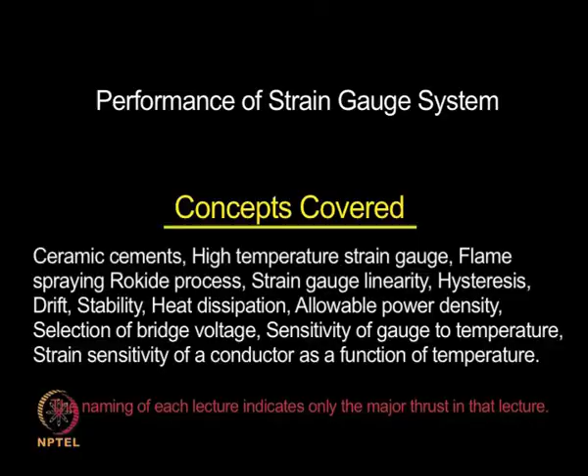Let us continue our discussion on strain gauges. We have looked at, in the last class, the strain gauge as a system consisting of the metallic grid supported by a carrier, which is bonded to the specimen by a suitable adhesive.

We have looked at quick setting adhesive like cyanoacrylate. Then we looked at epoxy, which is meant for sophisticated installations like in transducers, where you need to provide a very thin bond line, and also it should be suitable for longer periods of operation. Then we looked at polyester adhesive.

Now, let us look at the ceramic cements. Ceramic cements are useful for high temperature applications or in radiation environments. Nuclear power is becoming very important, so you need to live with radiation environments in such installations, and in such applications organic adhesives cannot be employed.

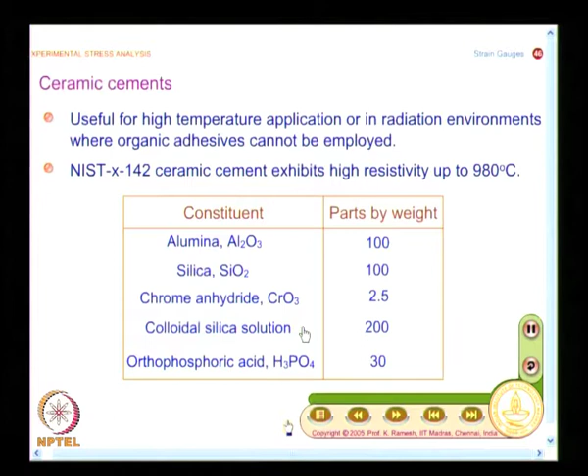So what you have here is a blend of ceramic powders such as alumina and silica, combined with phosphoric acid, mixed with a solvent such as isopropyl alcohol and an organic binder to form a liquid. Essentially, you have this ceramic available as a liquid, so that it is easy for you to apply it by a spraying process.

And what you do is, on the specimen you provide a pre-coat of the ceramic cement. After application, it is fired to form a thin layer between the gauge grid and the component. So it is a very elaborate process; you need proper training to handle this kind of special cement.

So once you form a thin ceramic cement layer on the specimen, you place the gauge, and the gauge is also very special - we will have a look at it a little while later. You have to remove the carrier of the gauge and place it on the thin layer of ceramic, and a second layer of ceramic cement is then applied.

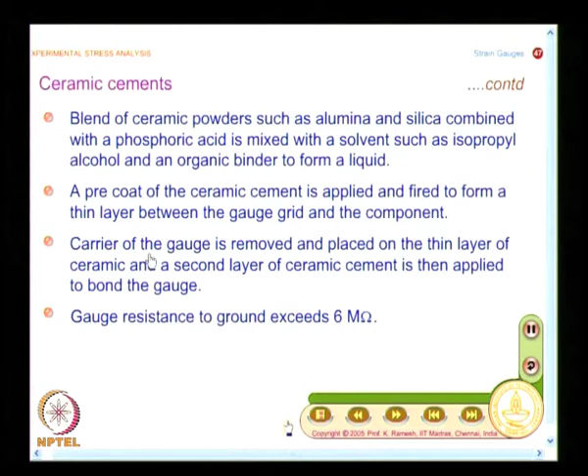So what you see here is you need to have a strain gauge such that its carrier can be removed. And you have an example of how such a gauge can be constructed. I have a sketch here - I essentially have a wire type strain gauge, and you have a Teflon tape carrier which could be peeled off, and you make a decent sketch of this.

So what you have here is gauges are constructed with a grid fabricated from wire, which is mounted on slotted carriers made of glass reinforced Teflon tape. The reason you have slotted type is you put a layer of ceramic, then the strain gauge would be bonded. At that time you can remove this Teflon tape, then again do a coat and complete your installation.

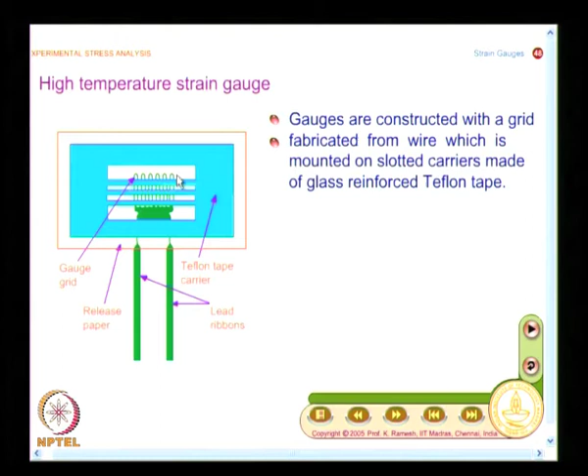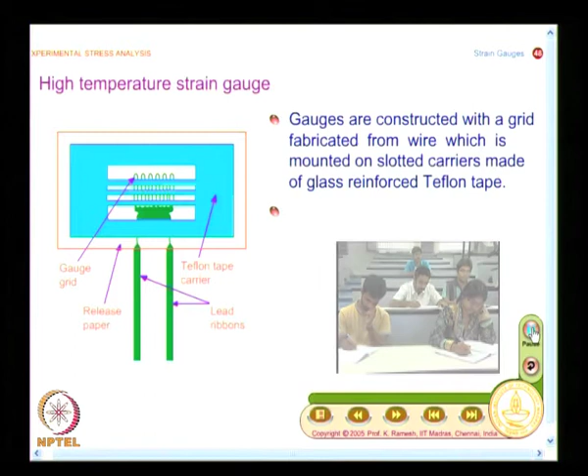In order to apply the ceramic, you need to have a special gun, and as I mentioned earlier, the tape is removed after the grid is secured to the component. So, it is a very involved process, not like simple strain gauge bonding, since you have to work at very high temperatures. You need to have a systematic procedure.

Here we look at one family of strain gauges which could be used for high temperature. There are also weldable strain gauges which we are not paying attention to now, but you should know that for high temperature application you also have another form of strain gauge which could be welded to the base material. Here we only look at forming a layer of ceramic, removing the carrier, and again putting another layer of ceramic, so that the gauge is properly bonded, and you have such gauges available commercially.

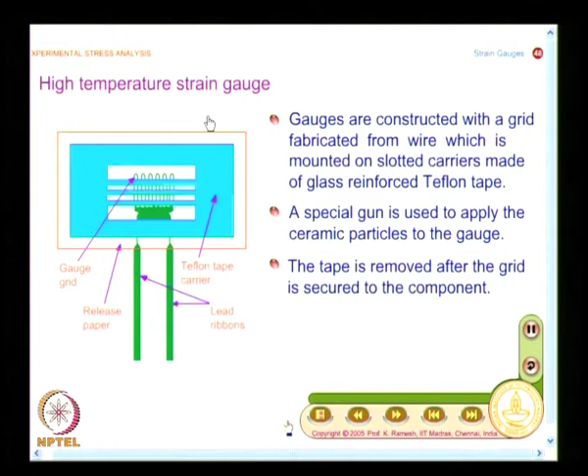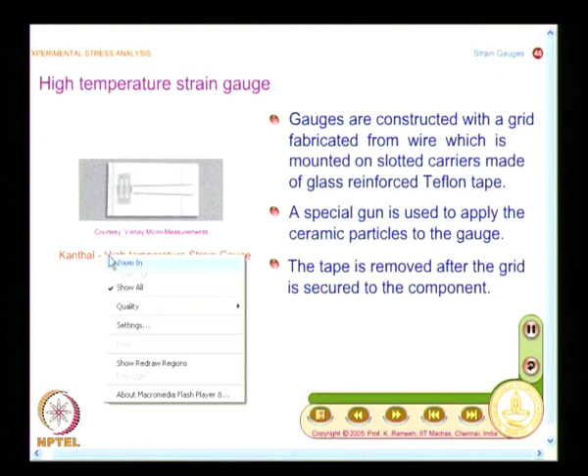And this is given by Vishay Micro Measurements, and they have what is known as Kanthal, which is meant for high temperature strain gauge, and you could see the slotted Teflon tape carrier, and you have the strain gauge available like this. So, this can be used to put the ceramic cement and remove the carrier and put another layer.

So, essentially you will have only a ceramic base and a metallic foil. There is nothing like a polymer that comes in between. At such high temperatures they will not withstand that, they will disintegrate. So, in order to make sure that your instrumentation is good at that high temperature, you form a ceramic layer.

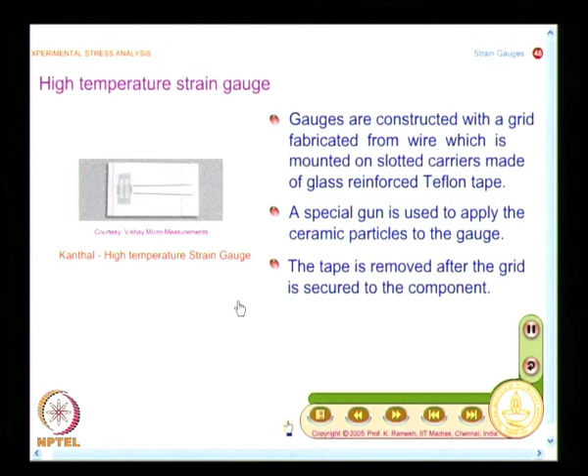And how do you do this application of ceramics? You have a special gun which is a modification of your gas gun, and you feed the alumina as a rod. So, you have a ceramic material in rod form fed into the combustion chamber, and because of the high temperature the rod decomposes into softened, semi-melted particles.

And you can actually have a closer look of this. So, you have the ceramic rod, you have oxygen and acetylene, and at the outlet of the gun you have an atomized spray of ceramic particles. That is what you get. The idea is to get a fine spray and spray it on the specimen, and by changing the rod you could apply it for different temperature ranges, that also we will see.

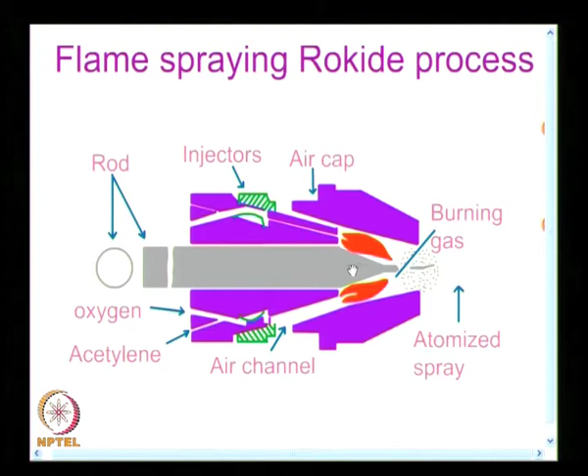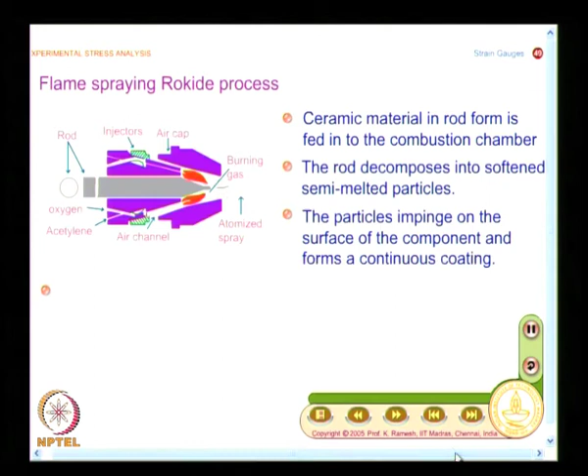The material that you use for the rod, if you change it, you can work for different temperature regions. And what you find here is you use a pure alumina rod for high temperature applications. On the other hand, if you use a rod which has 98% alumina with 2% silica, you could use it for applications below 425 degrees centigrade.

So, what you have in this process is the ceramic material in rod form is fed, and you have an atomized spray of these particles, and the particles impinge on the surface of the component and form a continuous coating. It is again a very special process, not like a simple spray gun. You have to handle it carefully to form a thin layer of ceramic.

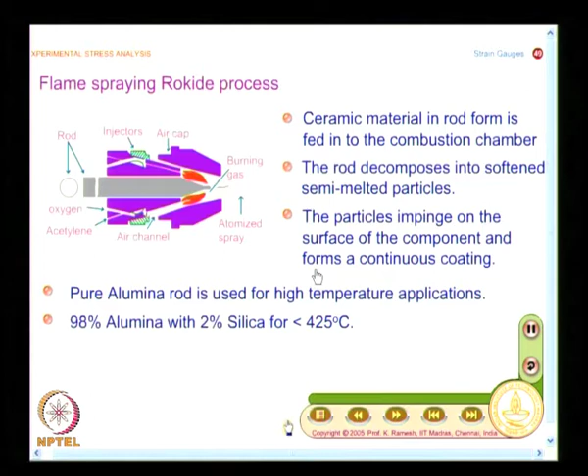Now, what we have looked at is the strain gauge system, consisting of the metal foil, carrier and the adhesive. Now, we will have to look at how this system functions in actual practice, what considerations we need to look at while selecting the constituents of the system. Depending on the application, I must select a suitable alloy, suitable carrier and also a suitable adhesive.

For high temperature, the selection is very simple. You know that you can't use epoxy or polyester as adhesive, you need to go for ceramic cement. But even from stability, hysteresis or linearity point of view, the constituents play a role. That is what you have to look at.

And I said strain gauge selection is a very important aspect that you need to learn. And for strain gauge selection, you need to have a background on what is the role of each of the constituents. Though this information is descriptive, it is also needed from the point of view of selecting the appropriate system for your measurement.

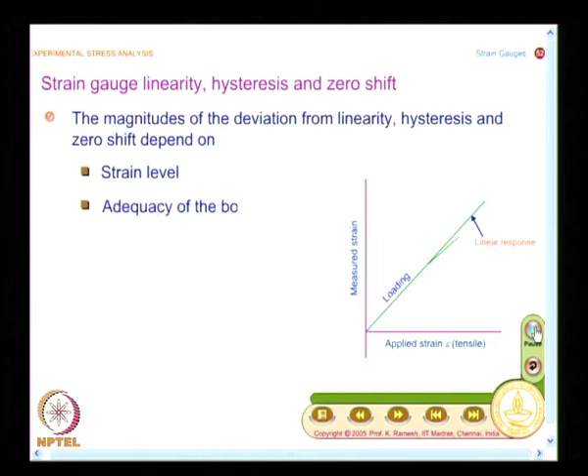And we have already looked at, you need to worry about strain gauge linearity, hysteresis and zero shift in any strain measurement application. And what happens to the magnitudes of these, like deviation from linearity, hysteresis and zero shift? They all depend on various factors.

What is the strain level at which I operate, whether the bond is adequate so that strain transfer from the specimen to the strain gauge is effectively carried out. And if you look at the property of the alloy, what is the degree of cold work of the foil material, and naturally the viscoelastic characteristics of the carrier material.

Deviation from linearity and hysteresis become very important in transducer applications. By changing the suitable carrier, it is possible to improve some of these aspects.

You should view strain gauge as a system consisting of the alloy for the strain gauge metal foil, the carrier, and the adhesive. Selection of all these three are interrelated, so depending on the application, you should select appropriately.

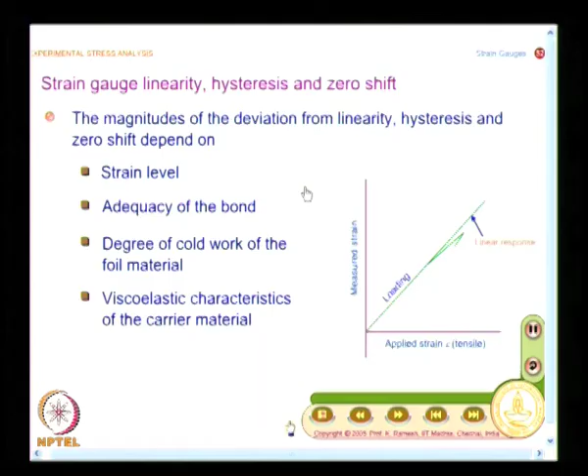Suppose I want to minimize deviation from linearity, then I choose an appropriate carrier. Polyimide carriers give deviation of about 0.1%. If I go for epoxy carriers, it is just half of it, about 0.05%. But polyimide is easy to handle, it is a plastic, even a beginner can handle it. Epoxy is brittle, and that is recommended for transducer applications.

So when I want to improve linearity, hysteresis, and zero shift, I need to go for sophistication. It comes with a price, it does not come freely.

We have also looked at strain level plays a role, and what is observed is hysteresis and zero shift strongly depend on the strain range, and that is what is illustrated in this graph. You can have a look at it.

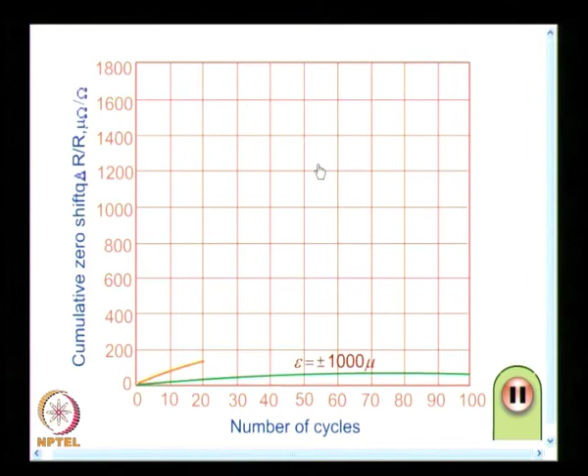It is very high, going beyond the elastic region, because 2500 microstrain is the strain range at which plastic deformation takes place. So if you closely look, there is an initial slope, as the number of cycles increases you have a gradient, and then it becomes horizontal, make a note of it.

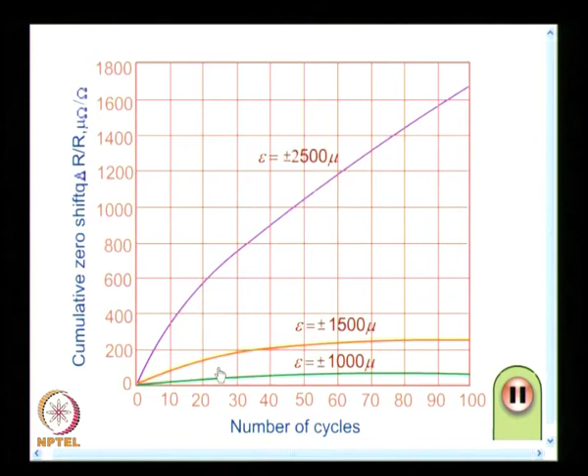How do you use this information for strain gauge instrumentation? What is the recommendation? That we will see now.

The recommendation is that the zero shift changes in the initial few cycles. The zero shift per cycle is much larger during the first 5 to 10 cycles, that is what the graph shows.

So it is recommended that a strain gauge installation be cycled to 125% of the maximum test strain for at least 5 cycles.

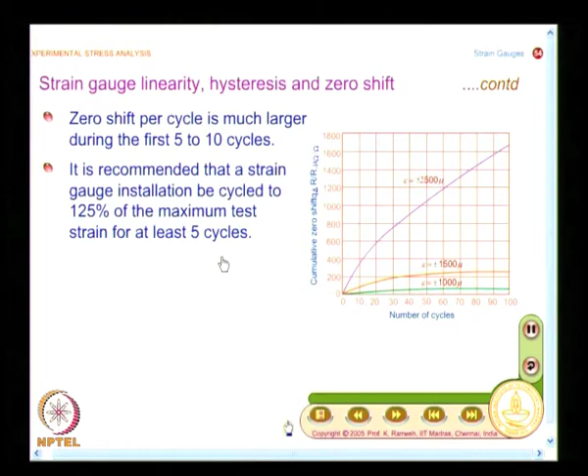So you do not go and make the measurement as soon as you paste it and the strain gauge is ready, once the adhesive is completely cured. The advice is you do a strain cycling, particularly when making a transducer.

I will do the calibration at the factory itself, loading it beyond 125%, doing a few cycles, and ensuring the system as a whole is stabilized before releasing it for actual measurement. Even in regular test conditions, it is recommended that you do a strain cycling before you make the final measurement.

Where does this knowledge come from? The zero shift is a function of the cycle. Initially the zero shift is more, after about 10 or 15 cycles it stabilizes. So the recommendation is to do at least 5 to 10 cycles, more is well and good. That is what you get from looking at zero shift as a function of the strain range.

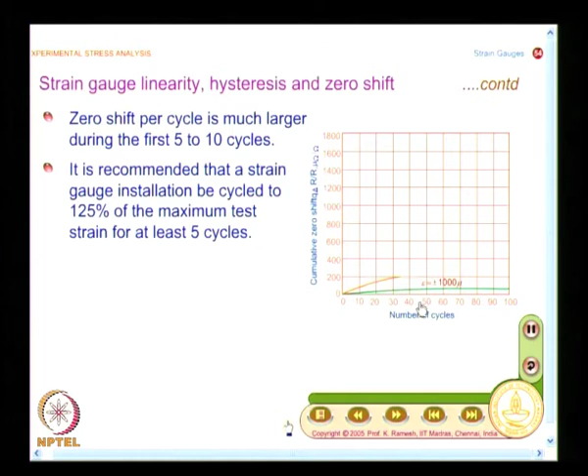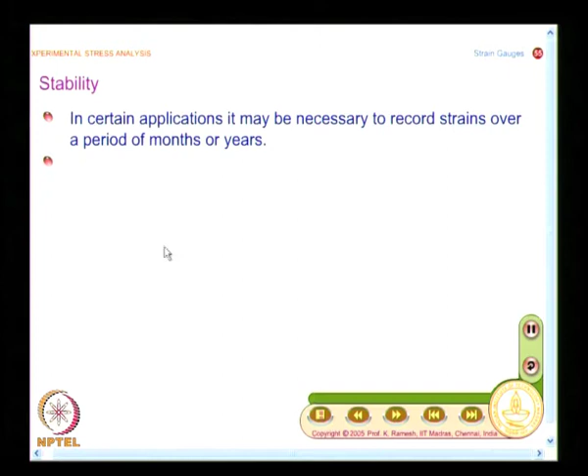Now we get on to another important issue in all strain gauge installation, that is stability. This becomes very important in applications when you have to record strains over a period of months or years, not just for immediate requirement.

Suppose I want to monitor structures like dams and bridges, we may have to do it for long periods of time. In such applications, there may not be an opportunity to unload the specimen and recheck the zero drift. So it is better that you select a system that is stable for such applications.

When I say the strain gauge system, you have to choose the proper alloying material of the strain gauge, the type of carrier, as well as the adhesive. All three go together. We will see a nice example where people have conducted experiments for a long period of time, changing the alloy as well as the backing and the adhesive one after another, and you find there is significant improvement.

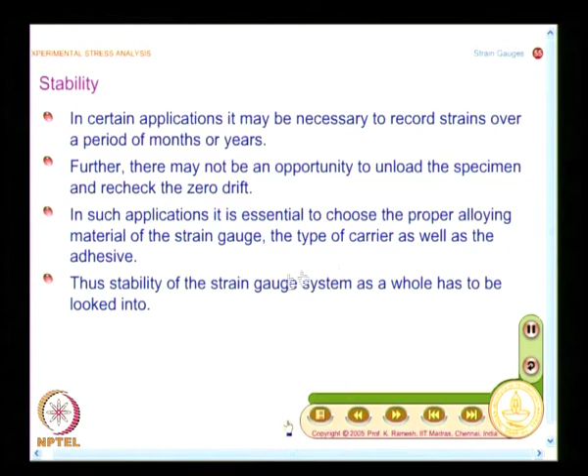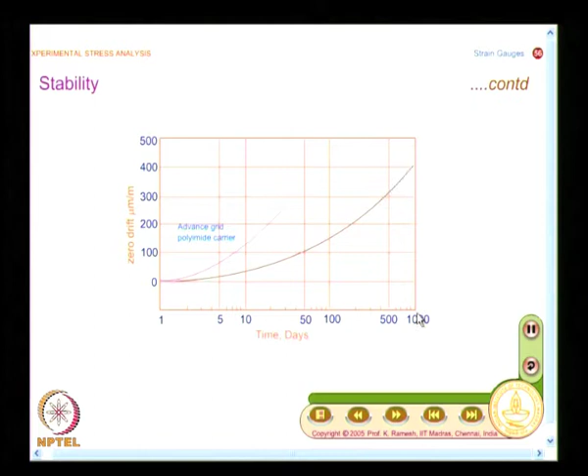And you have a nice example. I have a graph which shows time versus zero shift. Time is plotted in a log scale with 10 days, 100 days and 1000 days. I have three graphs. One graph is for strain gauge alloy Advance grid with polyimide carrier.

The second graph has the same grid material, again Advance grid, but encapsulated phenolic glass carrier. The carrier is made different - you have the encapsulation and the phenolic glass carrier. It is much better than the polyimide carrier.

So what you find is a very significant zero shift in a simple Advance grid with polyimide carrier, which is substantially reduced when I just change the carrier material. And the third graph, which is almost close to zero, is from Karma grid encapsulated with glass fiber epoxy phenolic carrier.

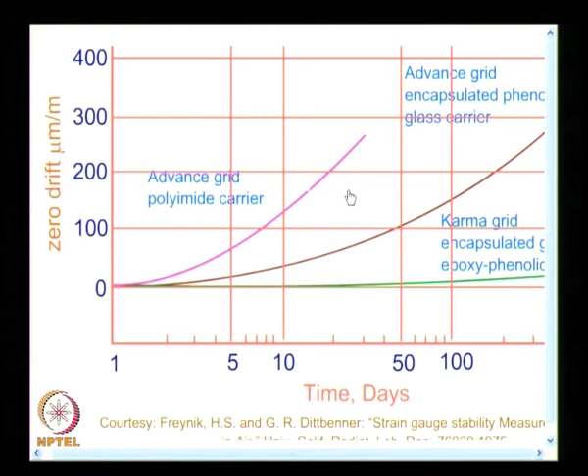So what you find here is by changing the strain gauge alloy, the system as a whole has improved. From the first graph to second graph, you found that the carrier has indeed improved, and a further improvement is possible by changing the alloy itself. That is why you need to look at the strain gauge as a system, and you have a summary of the observation in the next slide.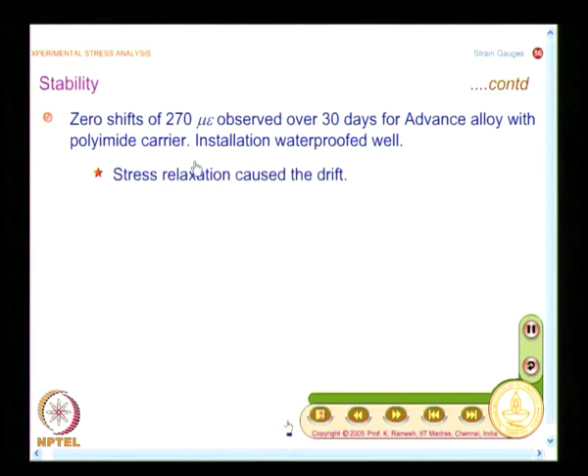When you are making a measurement, 270 microstrain is very high. If the zero shift itself is 270 microstrain, what level of confidence will you have in the final measurement? So for a given application, you need to find out if you have selected the right combination of strain gauge alloy, carrier, as well as the adhesive.

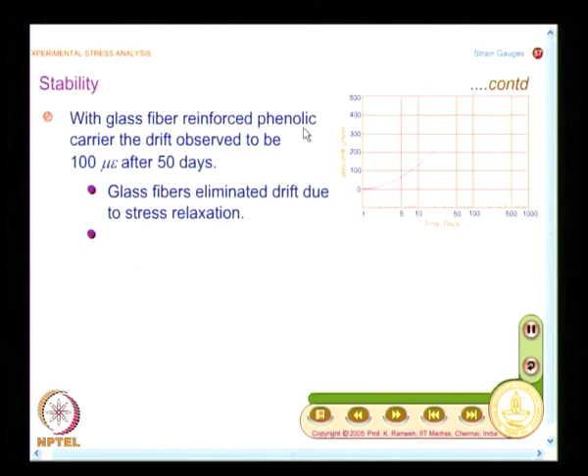You see in stages - initially we saw 270 microstrain, which is very bad. Now I go and improve the carrier. Instead of polyimide, if I use a glass fiber reinforced phenolic carrier, the drift has reduced from 270 microstrain to 100 microstrain even after 50 days.

In fact, that is what is listed in this graph. This is about 270 microstrain at the end of 30 days, and at the end of 50 days you find only 100 microstrain, just by changing the carrier for the strain gauge. So whatever the stress relaxation, the glass fibers eliminated that effect.

And also the whole test was done at 75 degrees centigrade. We have already noted that Advance alloy is a good strain gauge alloy for room temperature applications, and they also noticed that drift was due to instabilities in Advance alloy at the test temperature of 75 degrees centigrade.

So once you notice this, change the strain gauge alloy to Karma grid, but retain the same carrier with encapsulating glass reinforced epoxy phenolic carrier. Zero shift was only 30 microstrain after 900 days - that means almost 3 years, 2.5 years. For 2.5 years, absolutely no problem in your strain measurement.

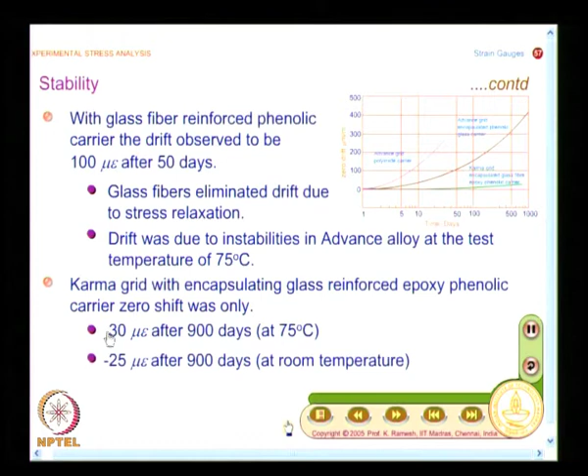So you need to worry about what temperature you are working at, and what backing and adhesive you are using. Here the adhesive role is not emphasized much, but Karma grid has worked at 75 degrees centigrade quite well. Even at room temperature, instead of positive drift, it has a negative drift of minus 25 microstrain. For long term measurements, Karma grids with glass fiber reinforced epoxy phenolic carriers with a well cured epoxy adhesive system is recommended.

So I said adhesive has not been mentioned, but for sophisticated applications, people go for epoxy adhesive, and you should also ensure that the gauge installation is waterproof well. You do this to minimize moisture penetration.

Not only this, we have already seen in a strain measuring instrument, I need to have completion resistors. The bridge completion resistors should be hermetically sealed to ensure stability of the bridge. The idea is you have taken care of the strain gauge installation, selected the right alloy, carrier and adhesive, but now you have to make the measurement using a Wheatstone bridge.

Wheatstone bridge has completion resistors, because in many applications we may do only a quarter bridge, the other 3 resistors are there in the Wheatstone bridge, and these have also to be waterproofed well, because you are trying to make the measurement for long durations. Sometimes you may take it for granted that your instrumentation will automatically take care. So you need to go for properly sealed completion resistors for such long term applications, it is very important.

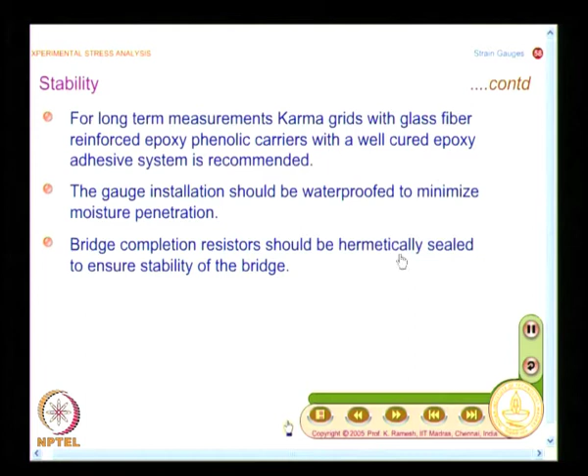Now we move on to one of the other important aspects in strain gauge instrumentation, namely heat dissipation. When you come to thermal effects, you need to deal with 2 effects. One is I work at moderately high temperature than room temperature. Suppose I want to measure strains on IC engines, then I may have to put it at the IC engine block, and the temperature will be higher than room temperature.

In such applications I should measure the temperature by a thermocouple, and then either look at thermally induced apparent strain and subtract it, or put another strain gauge at a similar temperature and make it a half bridge to handle the thermal effect. This is one type of thermal influence.

The other type of thermal influence is heat generation due to I squared R loss. This is very subtle. In many applications if you are working at high temperature, compensating for that you may do more routinely, because that is obvious. What is subtle is that because current flows through the conductor, the strain gauge itself gets heated. This is a very subtle issue, and you need to find out what parameters influence it.

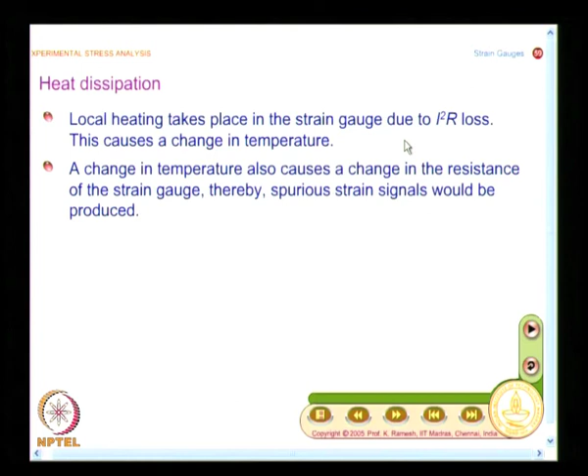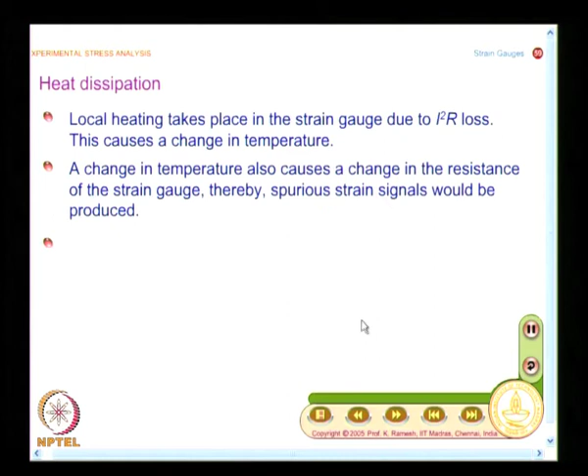And why do we need to worry about this? Whatever is the I squared R loss, this causes a change in temperature, which in turn causes a change in the resistance of the strain gauge, thereby producing spurious strain signals. So I need to eliminate these spurious signals, and this is the most challenging aspect of strain gauge instrumentation.

From this point of view, heat dissipation assumes importance. Whether you like it or not, the strain gauge gets heated, and you need to look at how to dissipate this generated heat. What are all the parameters I have to look at, so that I minimize any temperature rise because of buildup of heat due to I squared R loss. That is the focus.

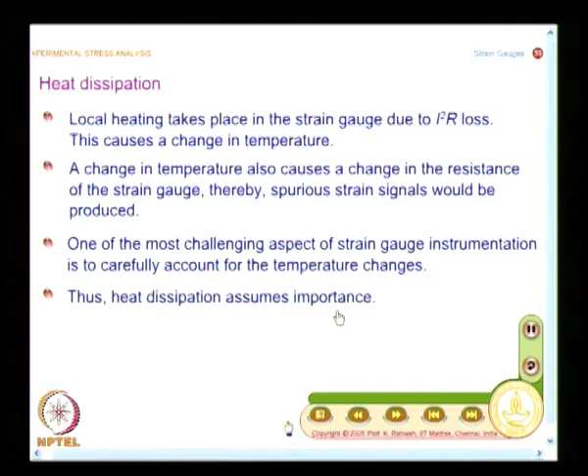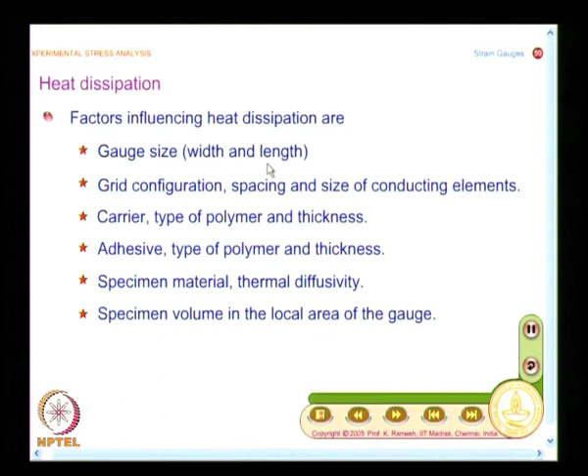It depends on various factors. The first factor is the gauge size. If you look at the catalog of strain gauges by manufacturers, you will find gauges of various widths and lengths to suit different applications.

The second aspect is the configuration of the grid, and the spacing and size of the conducting elements. When you say configuration, I mentioned I can have a rosette with strain gauges separately aligned, or stacked. From a measurement point of view, in idealizing the point at which you make the measurement, stacked rosettes are better. But stacked rosettes bring another problem: heat generation will be much more in a stacked rosette than in a normal rectangular rosette, where they are kept slightly away from the point of interest. They meet at the point of interest, but are not exactly on the point for which you want to make the strain measurement.

So grid configuration matters, and what is the type of carrier, the type of polymer, and its thickness. You can say the similar thing for the adhesive, and the specimen material also plays a role. Am I working on copper, or steel, or plastics? The specimen material matters.

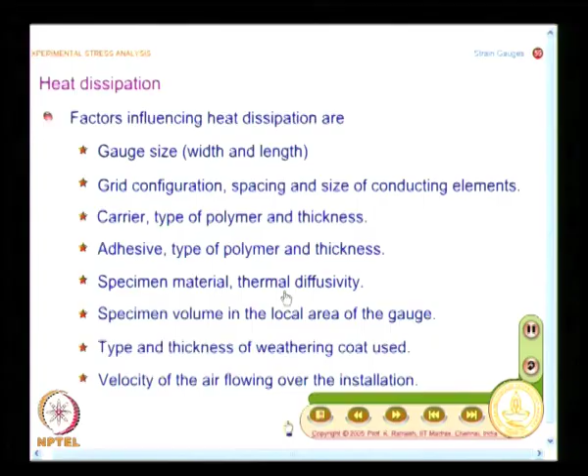Not only this - I may work on copper or steel, but even the specimen volume at the point of interest matters. If you have a very thick block of copper, heat dissipation is not at all a problem. So apart from specimen material, specimen volume also plays a role.

We have always been saying that whenever you do a strain gauge installation, you must provide a proper coating so that changes in weather do not affect your installation. That is good from one point of view - it prevents moisture absorption. But from a heat dissipation point of view, the type of weathering you use and its thickness also play a role, because if you put a very thick weathering coat, you are not allowing heat to dissipate. On the other hand, if I have a high velocity of air flowing over the installation, it is well and good.

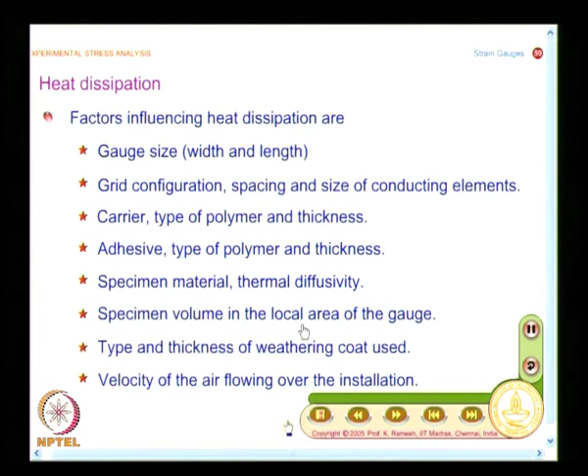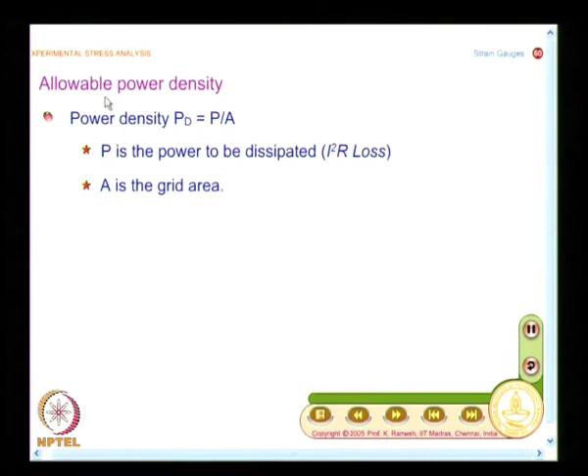So the manufacturer also looks at it differently. They recommend the allowable power density - that is the way they look at it. So you have a power density defined as P by A. P is the power to be dissipated, which you can calculate from I-squared-R loss, and A is the grid area.

Later we will also see the selection of strain gauges, where we will see a variety of patterns, and you will find gauges of different grid areas. Such grids are available because, from charts, for a given application and a given power density, you can select the kind of grid pattern. So I need to approach the problem scientifically - for a given type of specimen material and the thickness mentioned, this is the power density it can safely operate at.

What you find here is, if I have a heavy aluminum or copper section, the power density permissible, in watts per millimeter squared, ranges from 0.008 to 0.016. When I go for heavy steel sections, the power density value reduces, and for thin steel sections, it reduces further. When I go for poor conductors like fiberglass, glass, ceramics, or unfilled plastics, the permissible power density is almost close to zero - very small.

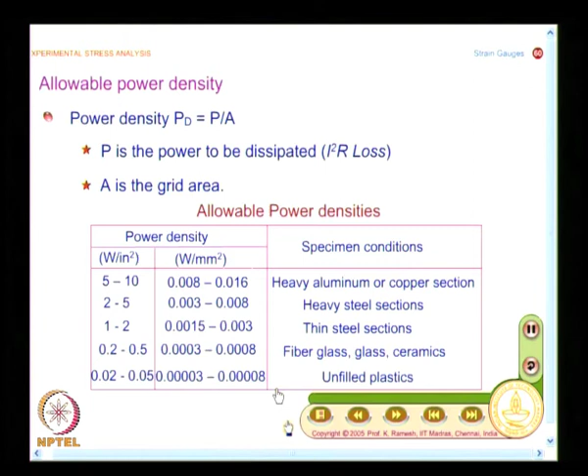So you need very efficient heat dissipation, and that is the reason I said if we have to work on composites, which are becoming very important structural members, you need to go for higher strain gauge resistances. And mind you, higher strain gauge resistances are also very expensive - it is not cheap. We already looked at making a small strain gauge with even 100 ohms, which needed a longer wire. So if I want 1000 ohms at the same place, unless I improve my technology, it is not possible, and improving technology also demands high cost. So if you want sophisticated applications, you need to go for higher cost - there is no other way available.

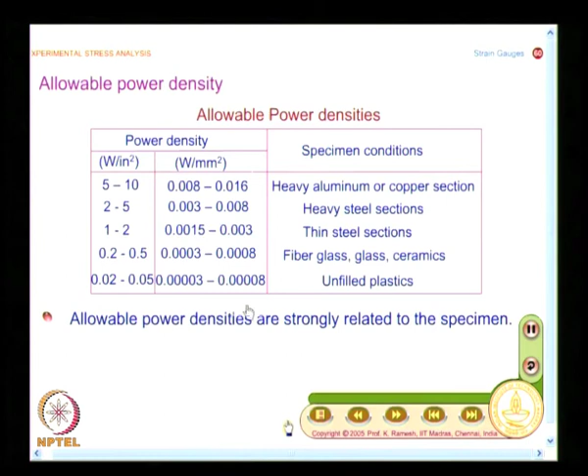So, this is what you have to look at. Allowable power densities are strongly related to the specimen - that is what this table essentially brings out. In a strain gauge installation, I said the strain gauge is a system consisting of grid alloy, carrier and adhesive. Now, from a heat dissipation point of view, even the specimen material dictates this.

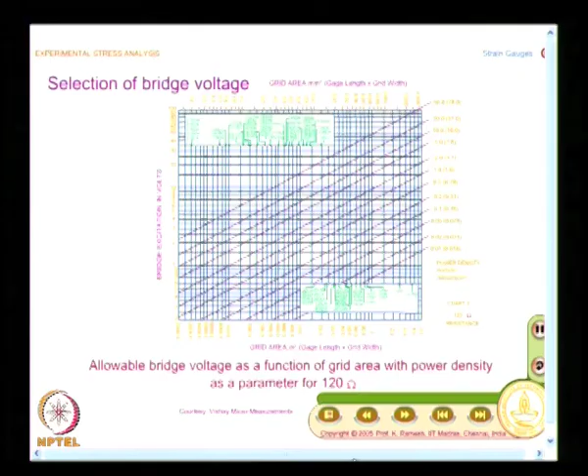The manufacturer supplies you with such complicated graphs. I will try to explain it in a very simple fashion. On the x axis you have the grid area - I will also enlarge it a little while later. So, on the x axis you have the grid area, and on the y axis you have the bridge excitation voltage. My idea is to find out the excitation voltage so that I satisfy the power density requirement. On the graph you find slanted lines.

These lines indicate different values of power density. If you look at it zoomed, what I find here is a line for 0.01 watts per inch square, or 0.016 kilowatt per meter square, and the power density increases in this fashion. So, if I know that for a particular specimen material only a particular power density is permitted, then this tells me what kind of gauge patterns I can choose.

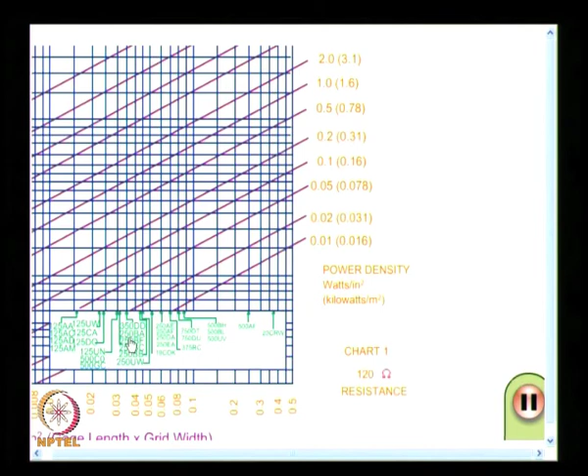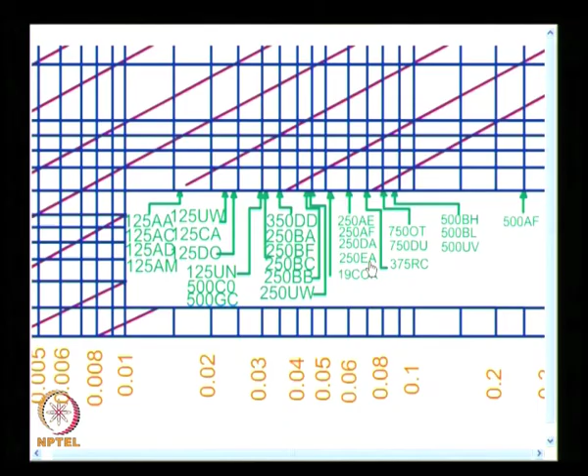I suppose you are able to see these letters - if not, I will enlarge it. What you find here as 250 AE, 250 AF, they indicate: first is the length of the gauge length expressed in mils, and AE, AF, DA, EA all pertain to a particular strain gauge manufacturer's classification of the grid pattern. You have so many grid patterns - they churn out many different grid patterns, and each manufacturer will provide you a graph like this for you to select the suitable grid pattern and also decide on the selection of bridge excitation voltage.

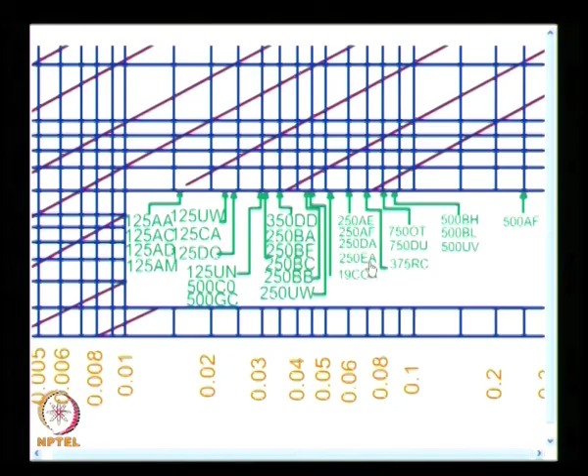If you look at the graph, you have a cluster of gauge grid identification here, and another cluster of gauge grid identification here. This is essentially grid area. You could have a wider grid or a narrow grid - you have different types of patterns. Your measurement application will decide whether you need a wide grid or narrow grid; all that decision you will have to take.

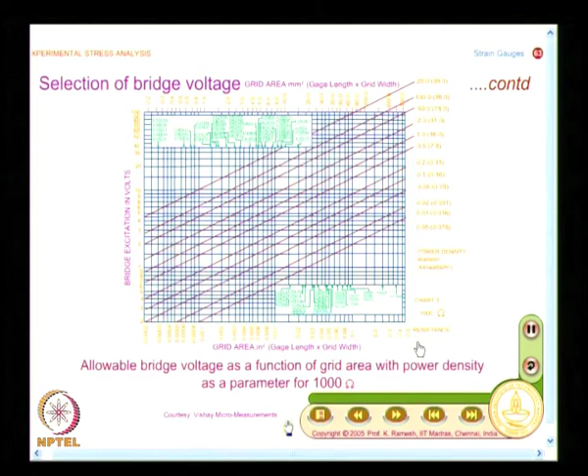If you also look at this graph, it's available for 120 ohms - this is a particular graph for 120 ohm strain gauges. Suppose I go for 350 ohm strain gauges, these power density graphs get shifted. That means I can afford to apply a higher voltage for the same power density if I use a higher resistance strain gauge. You also have another graph for 1000 ohms. This is just to give you an idea - such selection graphs are available from the manufacturer.

So, how do I go about selecting the bridge voltage? If you look at most commercial strain indicators, they use a bridge voltage between 3 to 5 volts. Small gauges mounted on a poor heat sink result in a lower allowable bridge voltage.

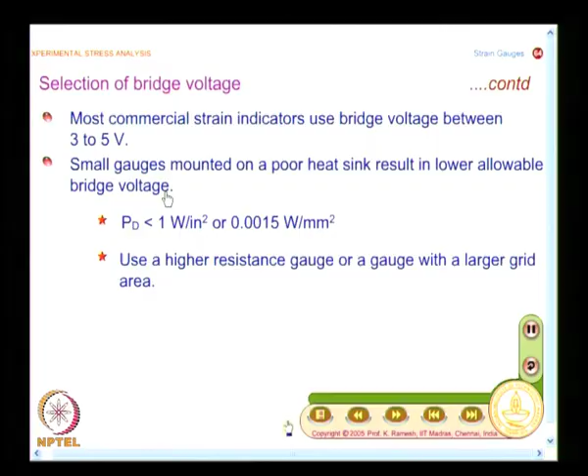That is the reason when we had a discussion on selection of gauge length, we saw that if the strain is varying linearly, the length of the gauge does not matter in interpreting the strain at the center of the strain gauge. Only when there is a nonlinear variation do I need to worry about selecting a suitable gauge length. I also caution that when you select a smaller gauge length, it is expensive, difficult to make, and in addition you need to worry about what bridge excitation voltage you can select, and also make special provisions for heat dissipation. You must allow a stream of air to cool the strain gauge installation, or pay some such special attention.

And suppose you are unable to improve your heat dissipation from external means, you can at least think of using a higher resistance gauge or a gauge with a larger grid area. This is the kind of selection compromise.

See, if I have a larger grid area, then I am deviating from idealizing measurement of strain at a point. I am measuring it only through an area. This is possible only when the strain variations are small as a function of distances. So selection compromises always exist. Without compromises, you will not be able to handle a problem.

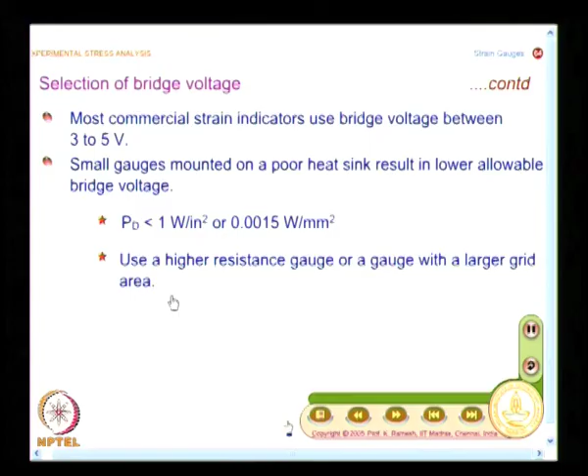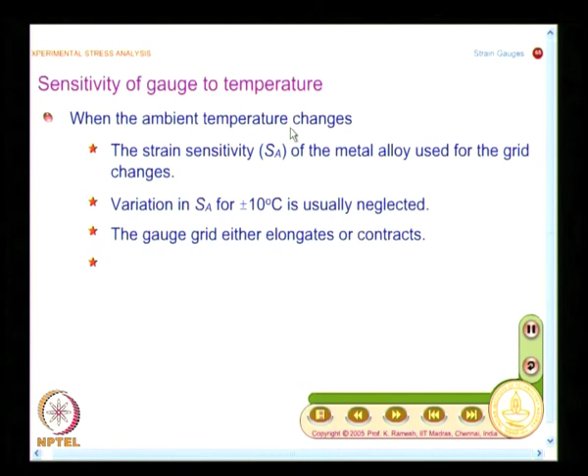Now, we have talked about influence of temperature in some form. We should also look at what is the sensitivity of the gauge to temperature. What happens when the temperature changes? The strain sensitivity SA of the metal alloy used for the grid changes. We will have to see how does it change, that is the question.

And for simplification, for a change of plus or minus 10 degree centigrade, the variation of SA is usually neglected. And it is obvious, depending on the coefficient of expansion, when the temperature changes, the gauge grid either elongates or contracts, specimen either elongates or contracts depending on the delta T, and you also find the resistance of the gauge changes, because we have earlier written the change of resistance to original resistance as Sg into epsilon.

On similar lines, you write the expression St into delta T, and you label St as sensitivity of gauge to temperature. Sg is the gauge factor which is used in interpretation of change in resistance to axial strain. When I bring in effect of temperature, I bring in another parameter called St, which has to be evaluated again experimentally.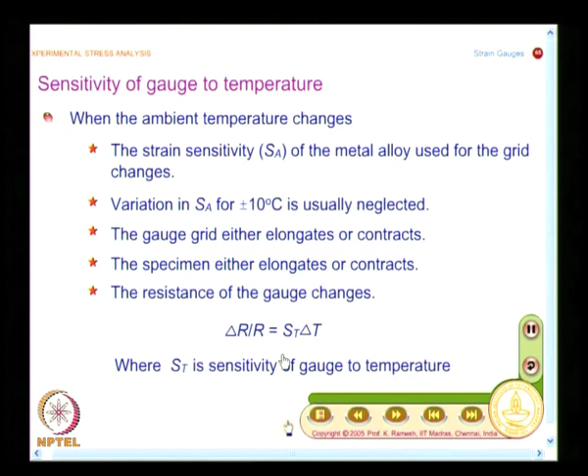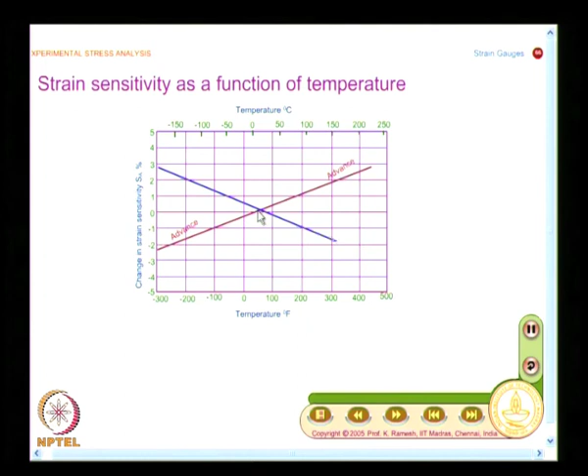How does this Sa change as a function of temperature? And what you find is, fortunately it is a linear graph for the popular strain gauge material like Advance, Karma, as well as high temperature applications like nichrome, Armour D, as well as the platinum tungsten type of strain gauge alloy. Only for isoelastic it is non-linear. So if it is linear, it is good enough.

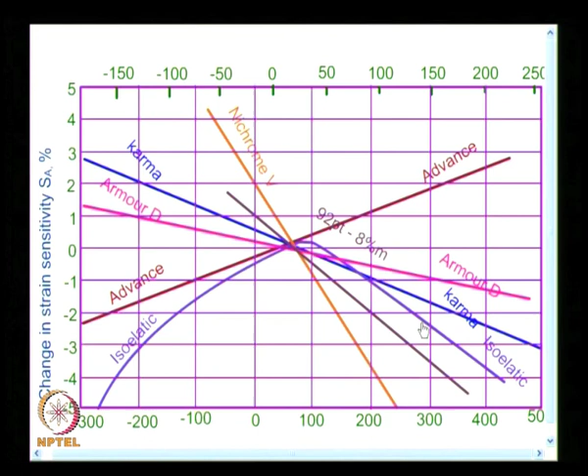So you just make a note that Advance and Karma, it is varying linearly. That is what you need to worry about. It is a variation is linear, fortunately it is linear. So we can do some kind of correction in that.

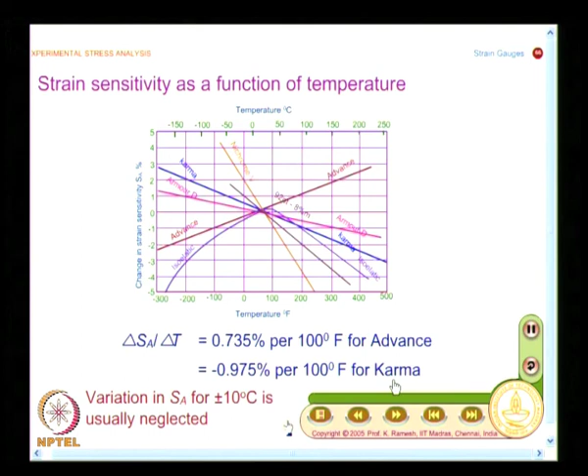So what you find in quantitative terms is change in the strain sensitivity of the conductor as a function of change in temperature is 0.735% per 100 degree Fahrenheit for Advance, it is minus 0.975% per 100 degree Fahrenheit for Karma. So you have this data, it is possible because strain gauge is constructed based on a conductor. So I need to know the conductor property, then I need to look at when I make it as a loop, how does this change.

So what we will look at is handling temperature information and segregating the change in resistance due to stress applied and temperature change is the most challenging aspect in strain gauge instrumentation.

So in today's class what we saw was we looked at how to use ceramic cements and what is the kind of strain gauge that you need to use for high temperature application. Then we moved on to performance analysis of the strain gauge system. I said you need to worry about deviation from linearity, hysteresis as well as zero shift, and we found the constituents forming a strain gauge influence these aspects.

We saw selection of the carrier influences the linearity, selection of the alloy as well as the carrier and an appropriate adhesive can improve stability for a very long duration. So selection is very important.